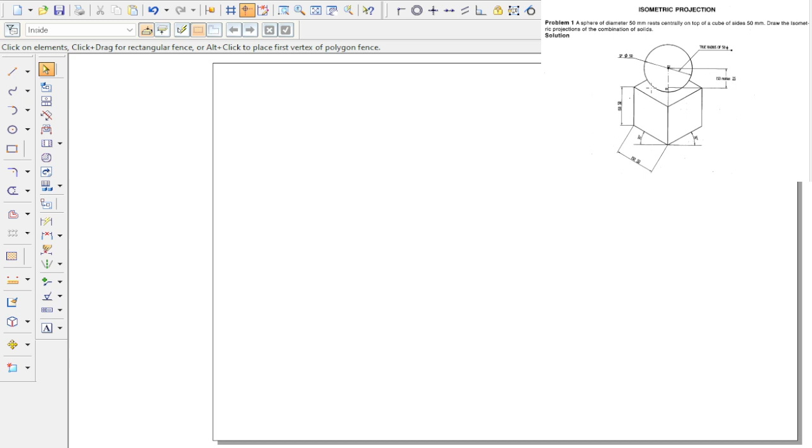So while drawing here, in the beginning, I'm going to draw with the true length. So until I reach to this point, the center of this sphere here, and then I'm going to use the scale, convert all the dimensions into isometric scale. Then I'm going to use the true radius of the sphere to construct this one. Let's see how I'm going to do this one.

So construction line or visible line we are taking here. So start with this point. So in the ribbon bar, this ribbon bar can be utilized to enter the length and respective angles of the isometric box here. So start with this 50 mm length, 30° is the angle. Again 50 mm length, 150° is the angle.

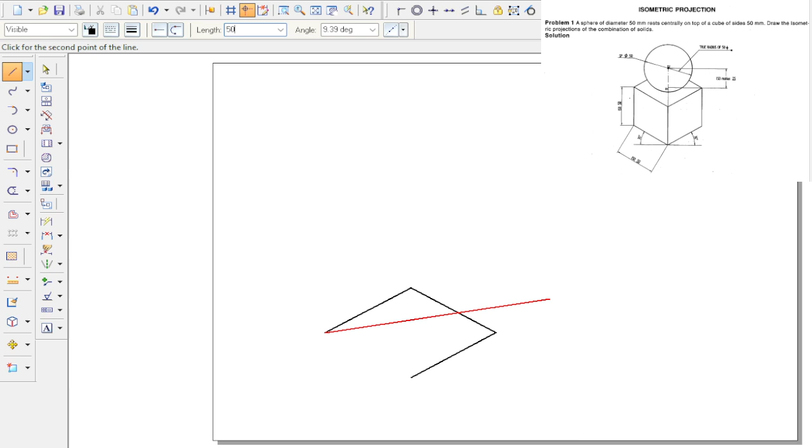Again 50 mm is the length, minus 150° is the angle. Again 50 mm is the length, minus 30° is the angle. The base of the cube is created. You can draw the vertical edges in 90° and 50 height. So instead of that, the copy of the base I am taking and creating the top surface.

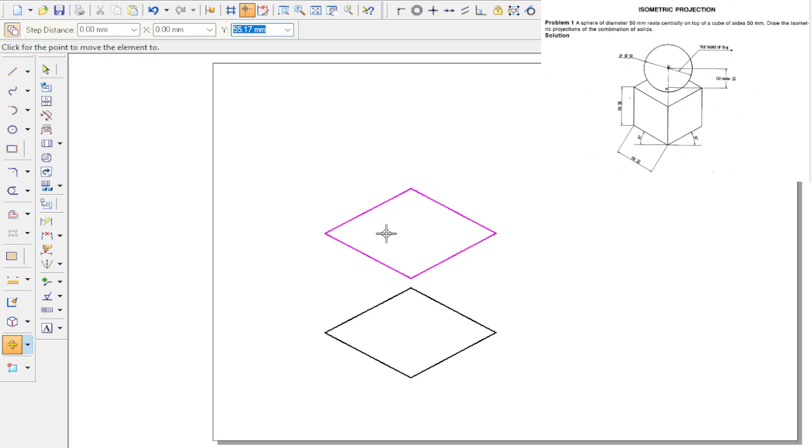For that move option I am going to use here. Select this, copy must be on. Click any corner of the box here. So while lifting here, X movement is not required, so in the ribbon bar X movement I am making 0. Press enter. Y 50 mm because height of the cube is also 50. So one copy I am taking. Now connect the visible edges.

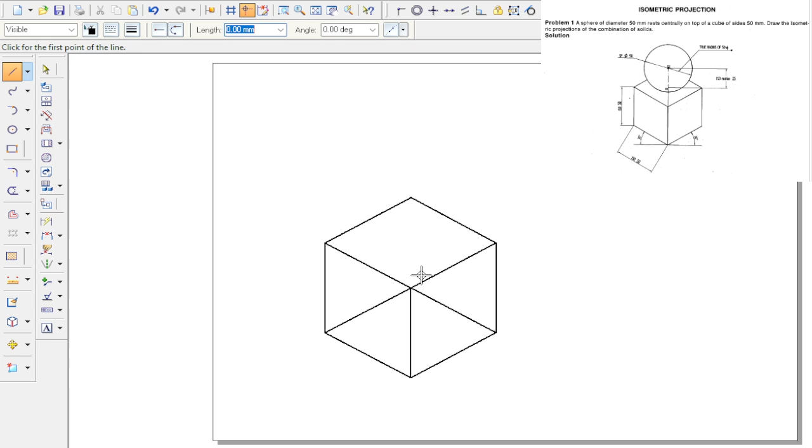So this edge also I can draw, but I don't want to keep any hidden elements here. These also I am going to remove. Take the trim option and remove this one. Over the top surface of the cube, the sphere is placed. So first we need to reach the center of the sphere. In order to reach the center of the sphere, the center of the top surface of the cube we have to find. For that I'm going to draw the horizontal and vertical lines here. This is the center of the top surface of the cube.

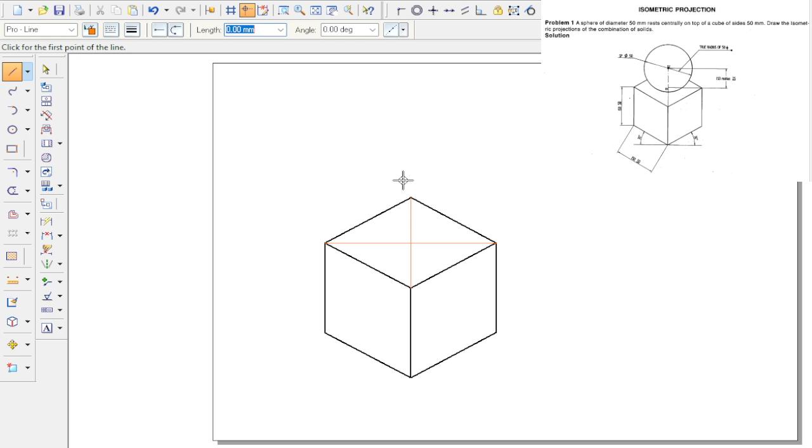From this center to the center of the sphere, I have to move. So here the true length I used. This is true length 50 mm. This is true length 50 mm. Okay. Whenever an isometric box has all edges equal to 50 mm, then automatically this vertical diagonal we drew also becomes equal to 50 mm. We can check it also like this.

So over this one, the sphere of 50 mm diameter is placed. So from the top center of the cube to the center of the sphere, we need to travel half of the diameter of the sphere. That is 25 mm. So for your understanding, I'm using a different line type here. The center comes here because the side length of the cube is 50 mm, once again equal to the sphere diameter. So automatically it comes here.

So to confirm, let's start the line here, because from the top surface of the cube to the center of the sphere, I need to use half the diameter of the sphere. 50 is there means 25 I need to move in upward direction. So length I will enter 25 here and angle 90°. See, once again here it is coming. That means this corner is going to be the center of the sphere. And if you want, you can show the dimension like this.

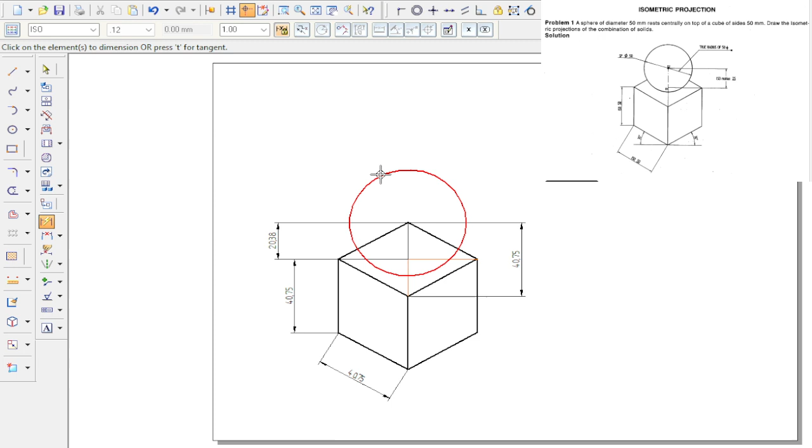So for that, I reached the center of the sphere. Now I'm going to use the scale option and reduce this one by the isometric scale factor, which is 0.815. Here, copy and place here. So now from this center, a sphere we are drawing, whose radius or diameter is true radius or true diameter, that is 50. So this is how the combination we have to do here, the isometric projection of these two solids.

Next step, I don't want to keep the hidden elements here, so let's remove this one. Then these dimensions are up to the center of the sphere. We converted all the lengths into iso scale. So this is ISO 25. This one I am going to change: ISO 25. This is ISO 50. This is also ISO 50.

This distance is not required to show here; for understanding purpose I showed it. When an equal side box we are constructing in the isometric drawing, the vertical diagonal we create in order to find the center is always equal to the box edge length. In this case, cube means all sides are equal, so this vertical diagonal is also equal. So this can be conveniently used to find the center of the sphere at the corner. So I'm removing this one.

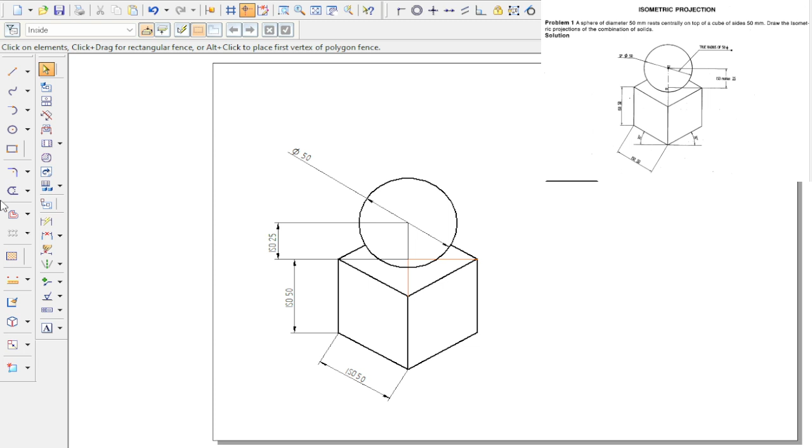So next, finally, I'm going to draw 30-degree lines here. The reference line I am going to draw and show the angle. So this is how the isometric projection of the combination of these two solids can be done.